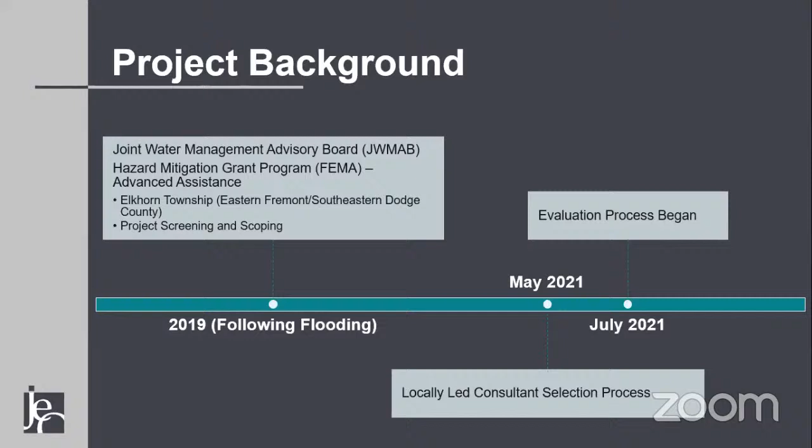Is really what this ultimately works out in. It's a unique opportunity, and it's a great thing to take advantage of. So we really started in earnest back in May 2021. And up till now, we've got the preferred alternative that we're going to share with you. And then we're going to be wrapping the ultimate project up in roughly June of 2023. So that's our overall schedule.

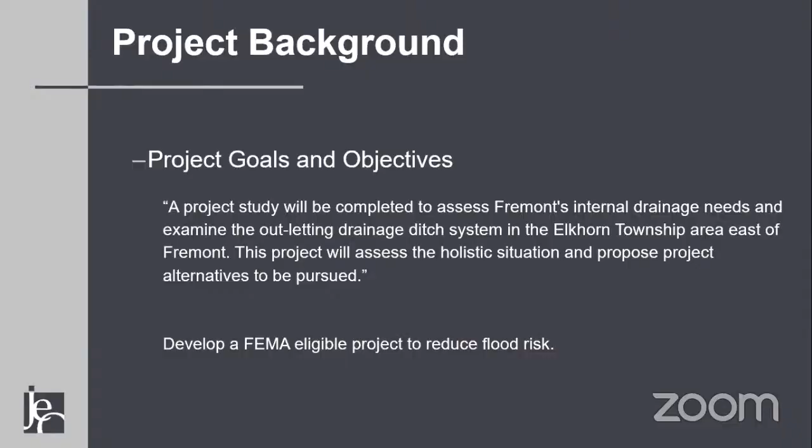And as we look at the grant application that Tom put together successfully, it really is to look at the whole Elkhorn Township area comprehensively to develop a comprehensive solution. This is an opportunity not to just pick around the edges and do something to maybe quiet the coffee shop talk. This is a chance to actually do something. And unfortunately, there's a problem that's been getting worse over the years, and it's been avoided because it's expensive. And that's just an unfortunate situation. But what we're talking about here is a way out, or at least a path forward to where we can hopefully eat this elephant.

So where is Elkhorn Township? I know some of you may be a little more familiar with the geography than others, but Elkhorn Township really has the western boundary of Highway 77, and it goes east all the way to the Elkhorn River. It really starts at the southern end of Dodge County, and it runs north all the way up to County Road T. So there's a number of very critical facilities in this area. There's the hospital, there's a power plant, there's a wastewater treatment plant. There's a number of churches and schools and all those critical facilities that, as you think of what happens when a flood comes, those are the places people go to for safe haven.

Another key component of this particular project, and you can see in these blue lines, they kind of crisscross things. This township in particular has a well-defined drainage network, and I kind of call it a spaghetti network of ditches that go everywhere. I got it. Yeah. So it's got a spaghetti network of drainage ditches that really go everywhere. They're all interconnected and everything else. So it makes it very complicated to address.

This township included a drainage district in the 1920s that really went defunct. I think they ran out of assets, but there were a number of easements identified for these drainage districts. Not all of them, but some of them. But all of those assets ended up going to the county. And it's kind of been in limbo ever since. So now is an opportunity to really look at some of these things. Another key component of this, and I probably will use the cursor to point things out. Hopefully everybody can just see the arrow.

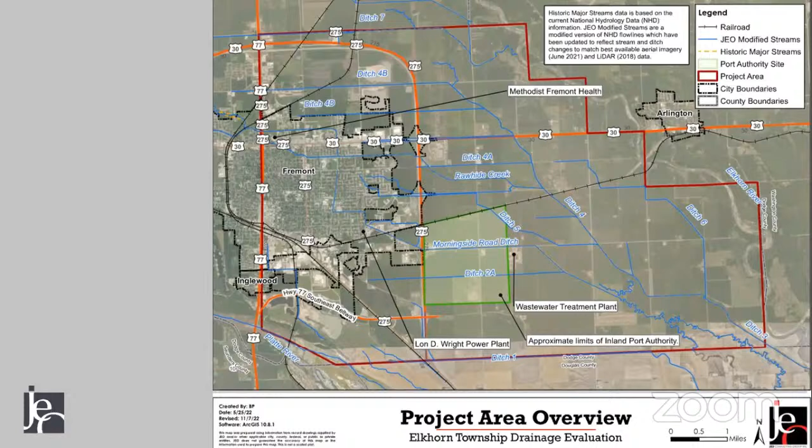So the other thing I wanted to address too is how does this project tie into all of the other things that are going on right now? This is only one of many drainage projects that are under review right now, and one that John Peterson talked about at length was this orange boundary. It's the Rawhide Creek WFPO project. And that project really looks at the entire Rawhide Creek watershed all the way out to Schuyler. We've been differentiating these two projects, because they really overlap in area and they both look at portions of the Rawhide Creek. The Rawhide Creek WFPO project, the intent of that is to really keep floodwaters from the west from getting to town.

And the Elkhorn Township project is how do we get water that falls in town out? So that's kind of the distinction of those two projects, at least on a high level, a way to kind of keep them separate. But there also is a Fremont West project that is just kicking off now that we're going to be doing some additional meetings here and getting started on. It has a similar scope to the Elkhorn Township, but it's just for a different area. Really starts at Highway 77 and goes west.

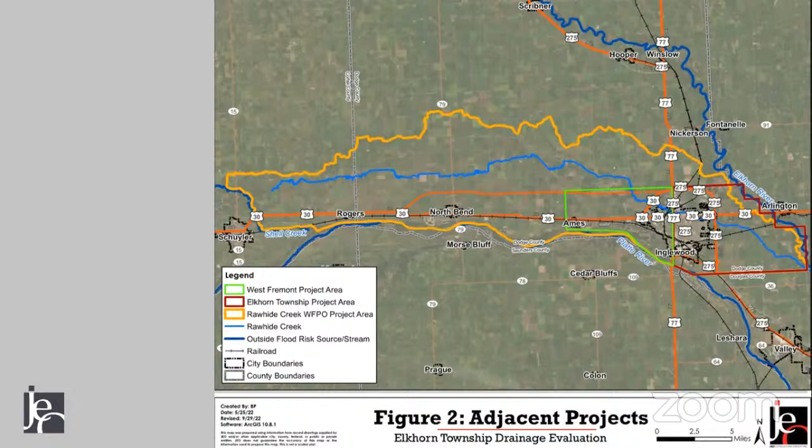So really, where are we at now with this whole process? I mentioned that we're kind of in a transition phase. And as we really look through this, the things that we've done now really it's evaluating the existing conditions, identifying what those deficiencies are, and then coming up with solutions for that. And then once we have a number of different solutions or alternatives, kind of wading through which ones make sense.

They all have pros and cons. There's costs to consider. There's political considerations. There's land rights, and all of those things kind of go into choosing what is the preferred alternative. And that's really right where we're at right now. There's been a lot of work done with the staffs of the various entities. And we have a project that seems to make sense to move on to the next stage. And that's going to make up the bulk of the next few months here as we go forward.

It's going to be that grant application. Our grant application is going to be due back to Tom Smith in the county, so we can get it submitted into NEMA. But it's going to be due roughly June of 2023, so that we can use the summer months to fine tune and work back and forth with NEMA and FEMA, so that the final submittal to FEMA is actually in the fall.

But there's a number of different things we're going to be working on over the next few months that all really support that grant application. And as we get into what the grant actually is, I'll get into that. But the whole point is what do we do to improve our chances? That's really what the next few months are all about. The one thing I did want to point out, though, is that at this point with the grant that we have, design, right-of-way acquisition, construction, none of those things are funded as of right now. All of those things will be included in the future grant application.

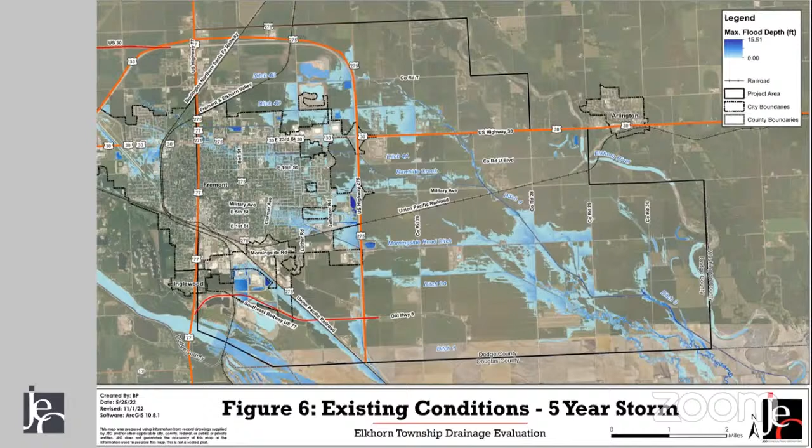So as we look at this, there are a handful of deficiencies that jump out at me. And as I go through this, don't take this as an order from bad to worse or anything like that. I'm really just going from the east side to the west side. So the first ones are all of these rural ditches, and I'm going to say all of them because they all are problematic.

For this 5-year event, what a lot of them are showing is that they're either running bank full or they've already overtopped the bank, which gets into why there's so much ag flooding in this area. So the conveyance of the ditch network is just inadequate. And that includes the ditches along the roadway network, but also those named ditches, some of which the county operates, some of which the NRD operates, some of which are probably just going through farm fields that nobody's really doing much to. But we'll call it the ag network of ditches is one deficiency.

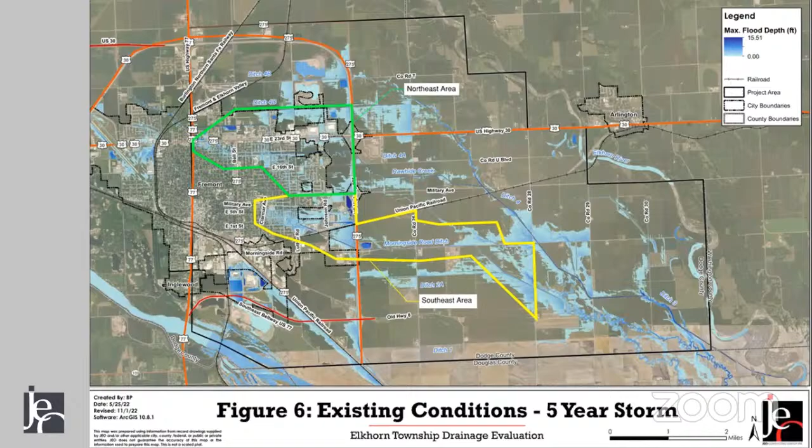So what we've developed in our study is really some very high level concepts for the north area, but the south area is the one we really focused on developing. And that's likely what we'll move forward into a future grant application. So what are some of those things that we kicked around to do?

So I mentioned earlier that eventually the deliverable of this project is a grant application to FEMA. So that's what we need to get to. So we really need to keep in mind what are those eligible things that we can do. It really centers around flood risk reduction, and it has to meet a benefit cost analysis. So as we started working through all the various different alternatives and ideas, it's with that in mind. How do we maximize benefits and make sure that we have more benefits than costs?

So I'll go through each one of these independently, but to let you know the idea and the process that we use, we actually look as a first step at each one of these things in a vacuum. So for example, if we only did an alternate channel to the Platte River, if that's all we did and nothing else, what's the impact? If we only did a groundwater dewatering system, what's the impact? What's the impact of a storm sewer only improvement? So we went independently one by one to see what matters and what doesn't.

And then I'll give you a preview of where we're ending up. The ultimate project kind of packages a handful of these things all together so we can really maximize those benefits and have the most bang for the buck. And keep in mind, what's really driving that is that earlier slide that I showed, is that we have about 5 different things that are all equally bad. We have ditch network, highway culverts, railroad culverts, city storm sewer, all those things are equally bad. So by fixing any one of them, we really don't see any benefit.

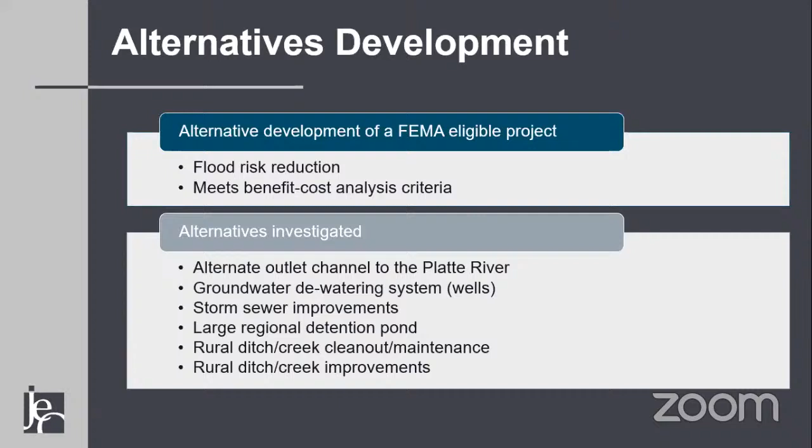So just to go through some of the ideas that we went through. So the first one we looked at was an alternate outlet to the Platte. As you probably remember, the map where we have Rawhide Creek and all of that spaghetti network of road ditches, they all drain east, southeast to the Elkhorn River. So one idea was maybe we can provide additional conveyance if we just go directly south and get it to the Platte River.

So the first thing that really ruled this one out is that the existing ditches, and to give you a point of reference, the existing ditch at Morningside, it's also called the sewer ditch, runs out east. The flow line or the bottom of that ditch is lower than the Platte River is. So in order to drain to the Platte River, we'd be going uphill. So that right there generally rules that out, because we need this to function with some fluctuation in both the Platte River or Elkhorn River, whichever one we're going to, because if it's raining in Fremont, it's likely raining in other places too.

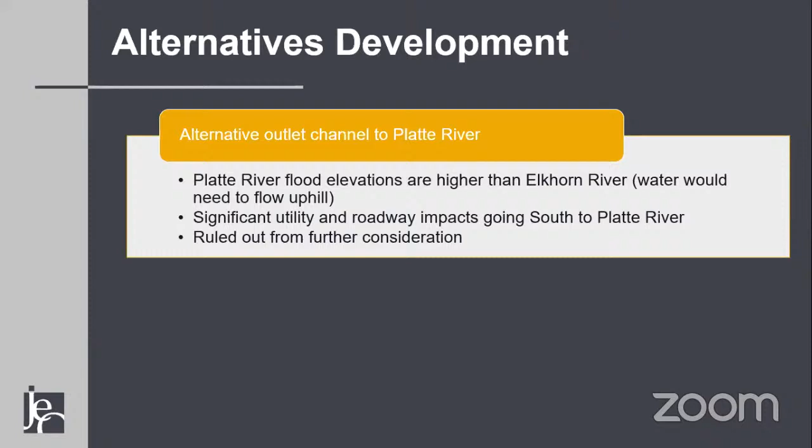So this one was actually ruled out from future consideration. Another one that we heard that was worth looking into and having some ideas on is what would happen if there was just a massive groundwater dewatering system for the entire east part of town.

So what this would encompass or look like is dozens of high capacity groundwater wells that all pump groundwater and then discharge it to something else. This would be what's called a non-consumptive use. So this would be a pump and dump situation. We're just pumping water out of the ground, putting it in a ditch. We're not doing anything productive with that water.

So one of the big challenges of a system like that is, what do you do with all of that water? So generally speaking, in order to have any meaningful reduction in groundwater levels, we would need to be pumping somewhere in the neighborhood of about 60 to 75 cubic feet per second. If you're not in that world, it might not resonate. But what that does is it really doesn't drop the groundwater level regionally. It does very close to the well, but regionally, it only drops it maybe a foot or two, maybe 3 feet at most.

But a bigger problem is, now what do you do with all that 60 to 75 CFS of water? The most logical place is to dump it back in the ditches that we just showed. They're already way undersized. So ultimately you would be using up nearly all of the capacity of the ditches 24 hours a day with a pump. So when it does rain, the rainwater actually has nowhere to go.

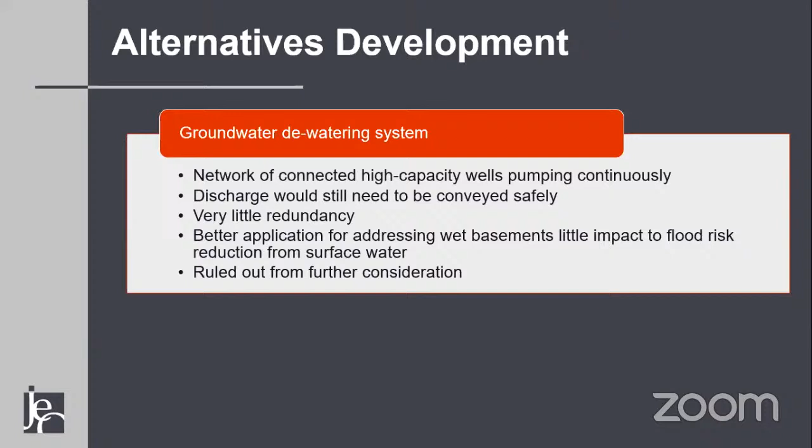So there is a very, very high likelihood that unless you address all of the downstream ditches or potentially pump this all the way to the Elkhorn River, you'd actually be making the problem worse because you now have nowhere for the surface water to go, and you've not really improved things too much. So again, this one was actually ruled out for further consideration.

So the next one we did was really look at what if we just do a massive storm sewer improvement in town. We can start widening the urban ditches. Most of those are pretty much shoehorned into existing right of way, but there would be an opportunity to make all of the storm sewer pipes bigger. That totally is on the table and one of the things we looked at.

The big challenge is we're starting at the upstream end of the system, so we're making those things bigger without any way to get the water all the way to the river. We still have deficiencies at the railroad, at the highway, and the rural ditches. It does make things better immediately in the area where we'd add the storm sewer, but all it does is dump the problem downstream on somebody else.

So in and of itself, the storm sewer improvement is not something that will work. We'll come back to this, and it does play a role in part of the overall one, but it has to be paired with some of these other things, or it's just frankly not going to work.

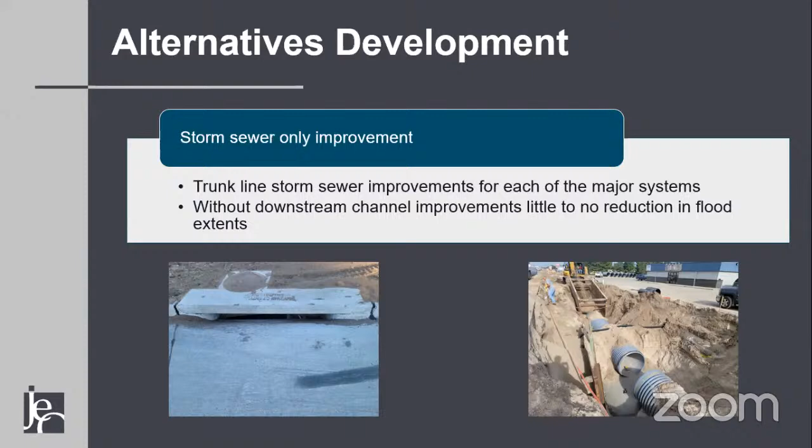So another one we looked at is what happens if we created some storage, had a massive detention pond somewhere. So one thing to keep in mind with detention ponds is that they do a great job of reducing flood risk downstream of wherever the pond is, but they basically do nothing upstream if that's the only thing you do, right? So if we were going to look at a detention pond only alternative, the best place for the detention pond is right where all the homes are that we're trying to save, which is completely counterintuitive.

So again, the detention ponds that we looked at on a detention only alternative were west of Highway 275 in the already developed area. And there just wasn't enough open ground or publicly owned ground to really move the needle that much. And then we also saw an issue that it didn't really solve anything if we weren't fixing anything either upstream or downstream. But again, we'll come back to this one as well, because when it's paired with other things, it starts to make sense.

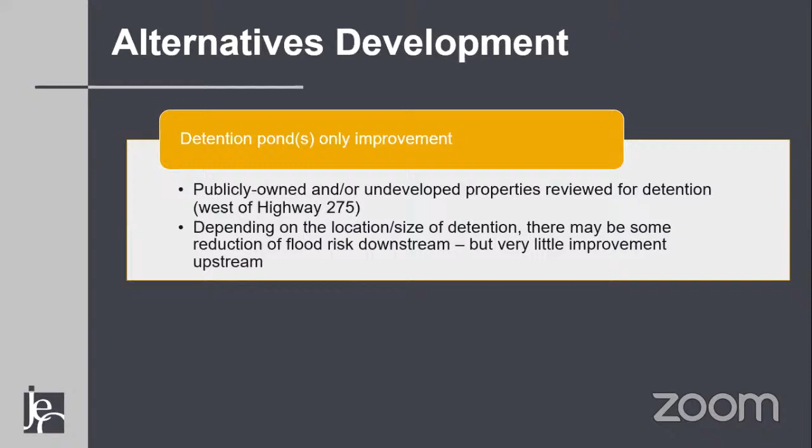So another one that we really looked at was, well, we've got these ditches that are running all over in the rural part of the county. What happens if we just clean them out? Right? I think anybody that drives through there will say there's a lot of trees and debris and corn stalks and everything else that has built up over time. I think that's a fact that we can't avoid.

But if we were to open those things back up, back to their original shape, how much benefit would that really give us? I think the one thing to point out is that this is a representative cross-section of what those channels would actually have to be if we're going to pass that 5-year event entirely within the channel. So the way it works out is the existing channel has somewhere in the neighborhood of about 125 cubic feet per second. At that particular cross-section, we would need to pass 590 cubic feet per second to address the 5-year flooding.

So the question still remains, if we were to clean out the ditches, would it help? Well, yes, but it doesn't help for the 5-year event. It doesn't help for the 2-year event. It would help for the 1-year event. It'd help for the 6-month event, but we're going to very quickly overwhelm the system downstream unless we physically make those channels wider.

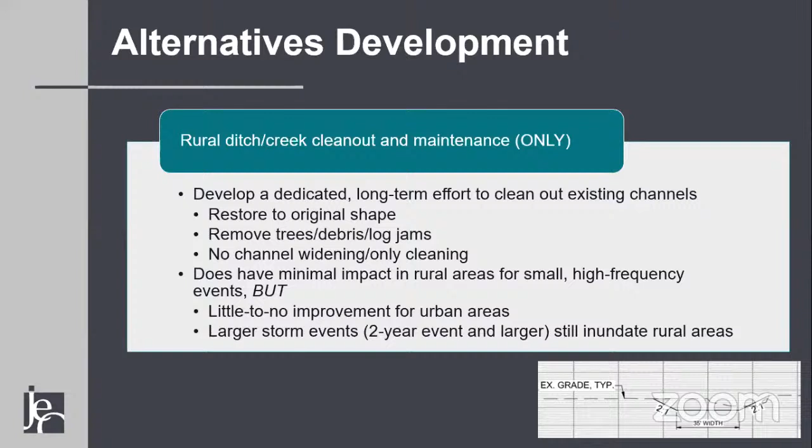So really that gets into our next option: what happens if we just do that? What happens if we just widen all of the ditches out in the rural part of the county and do nothing else, all the way to the Elkhorn River? Some of you may be familiar, but there was a project to do just that on the books in 1997. It was a joint city, county, NRD project that was kicked around. It ultimately fell apart because of funding and some other things. It's probably not relevant for right now.

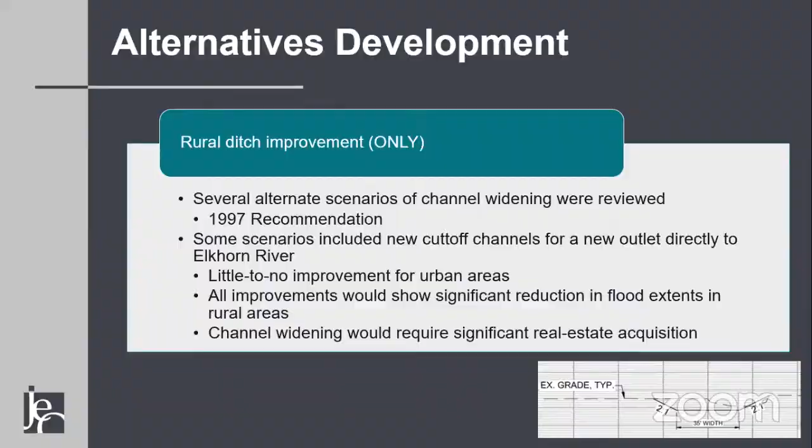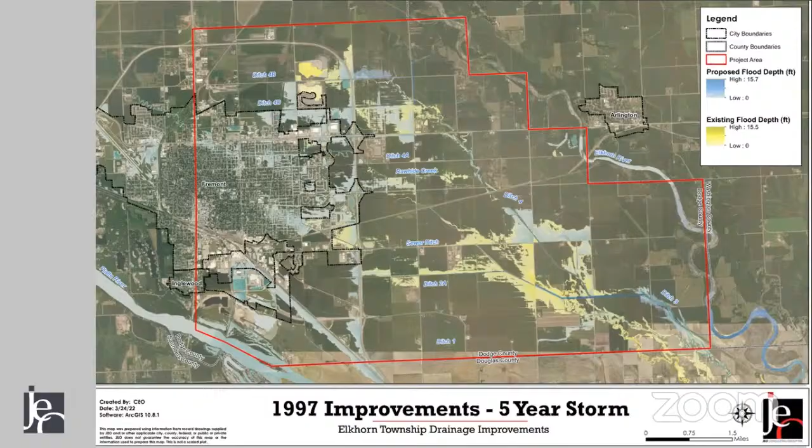If you really zoomed in on this map, you'd see a little sliver of yellow around the fringe, but it's minor. We're talking a reduction of maybe a couple inches up in there rather than feet. And the big reason for that is because we've addressed one of those deficiencies, the rural ditches, but the other 3 or 4 we haven't touched. So that's where we got into, okay, we've got a lot of things that don't work. That's not very helpful. Tell me something that does.

So that's where we start packaging these things together. I'll show you several maps, but I wanted to get it out here in a narrative version for those folks that are more text oriented. We start with, on the east end, a detention pond that would be proposed somewhere east of Highway 275. The final location of that is yet to be determined. There's a lot of irons in the fire. There's a lot of opportunities out there. We just need to work through some of those things.

Then we would need a channel improvement upstream of that detention pond so that we can get more water to the detention pond, really all the way up to where the existing channel daylights at 5th and Luther in town. We would also need culvert improvements associated with those channel improvements at US 275 at only one location, at Morningside. We're not talking about all 5 of those going up north, but at Morningside. And then also the railroad, which is a significant restriction.

But then storm sewer improvements or some of the urban channel cleaning out and maintenance on both 1st Street and 5th Street, which there already is a project out there. I think it's in the planning stages of budgeting for a 1st Street paving improvement.

It'd make perfect sense to do those things at that time, and that's really why we chose 1st Street, so those 2 things can be tied together. But then another big piece of this is the existing channels downstream or east of wherever this detention pond are all still need cleaned out. So you would be working with the county and NRD and the city to develop an operation and maintenance plan, develop a list of responsibilities, and some timing of when those things need to happen.

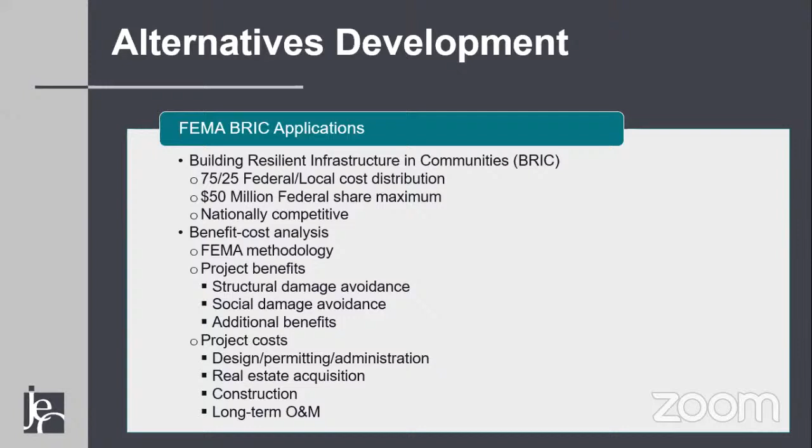And then a big piece of this is that in order for FEMA to buy off on the project and ultimately fund it, having an actual agreed upon long-term operation and maintenance plan that's funded is another critical element. So it has to be funded. We can't just say that we're gonna make Scott go out there with a push lawnmower and deal with this. That's not practical. So having that done is pretty critical, but those costs are rolled into the actual application as well.

So as we look at this, the first side of the equation is benefits. How do we come up with that? So a few key elements, at least as we've got it in concept right now. We're looking at 300 urban properties that we're seeing flood risk reduction for, which is a pretty significant amount, right? And when we add up all that yellow area in the rural part, it actually ends up being 105 acres. If we take some advantage of maybe building the detention pond bigger, I think we can shrink that, or we can add to this number by shaving off even more flows out of the detention pond.

But our biggest benefit really coming out of this is the structural damage avoidance of between 65 and 75 million. So you're going to see ranges on here. Keep in mind, it's the goal over the next few months to get that from a range to a number.

So that's where we're heading next. What the structural damages really are a function of is how much are you reducing the flood depth at any one structure, and what's the value of that structure. So the value we pulled right off of the county assessor's information, and the flood depths we pulled right off of our model. So in the next few months here, we are going to be working on doing some actual surveying so that we can have real first floor elevations.

We pulled a lot of those since we have 300 properties that we're looking at. Pulled a lot of that information off of available information like LiDAR. So we're going to be firming that up and getting to a little better number. But I actually feel it's going to be closer to 75 million.

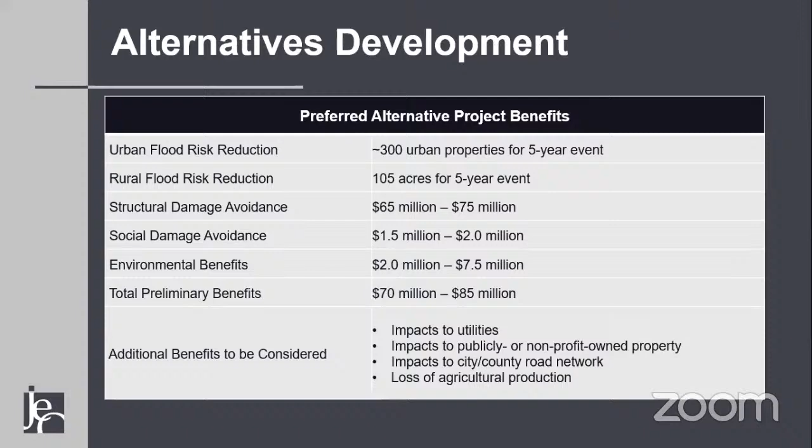So if we really look at the cost side, obviously this is a big project. I'm sure you're all expecting a big number. Right now, I've got this broken up into 3 separate phases. One of the big things that we're going to be doing over the next few months is having conversations with the city and the county, primarily the NRD.

Might not have as much to weigh in on, but how does this animal get broken up? Just because FEMA looks at it as one overall project, it doesn't necessarily need to be one project in the eyes of the city and county and NRD. The city could lead this piece, the county could lead that piece, the NRD could lead that piece.

That's what we need to figure out. So this phasing is likely to get cut up quite a bit. But the bottom line, when we're looking at an all-in number, we're really looking at a $55.4 million improvement. What that includes is not only the construction, but all the administrative fees; we just applied a straight percent to it. It also includes land acquisition costs, permitting costs, all those various different things,

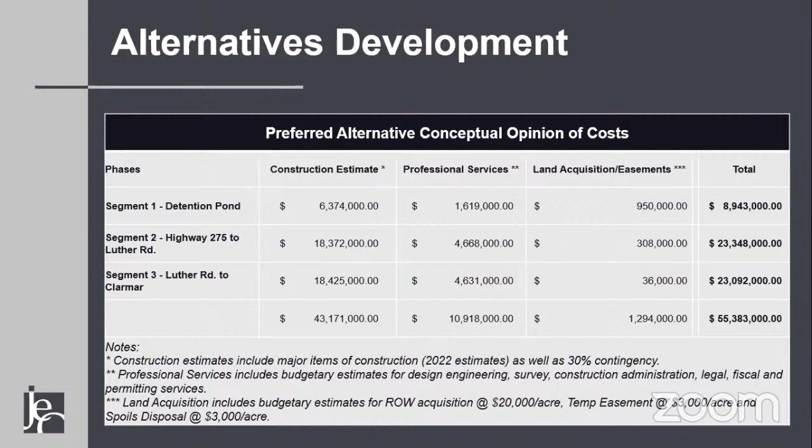so you can have kind of an all-in project cost. So when we do this preliminary benefit cost analysis, you do all this work and it all boils down to one number. All you do is divide your benefits by your costs, and as long as that number is greater than 1, you're eligible. So ultimately we have a cost of 55 million and benefits on the low end of 70 million. So that's a positive number. It's a 1.27 to 1.55 where we're sitting right now.

Now we have some additional benefits to add in there. The way the process goes, having been through it, FEMA is always going to find something to ding you on. They're going to try to take something out. So we do not want to go into the process with a benefit cost of like 1.01 because they will find a way to kick you out. We have to have some fluff in this thing.

Then again, we don't want to go in too high. It's a game, right? If we go in with too high a number, they're not going to believe that it can possibly be that much, so they'll find another way to kick you out for that one too. So we have this sweet spot of about 1.5. I'm sure you've done projects with this before. Is that benefit cost ratio in the ballpark? Have you worked with numbers like that before?

Yeah, so I've had projects in Nebraska, 3 or 4 of them in Lincoln, Nebraska City, all over. Generally speaking, if you're in that 1.5 ballpark, you're sitting pretty good. It doesn't do you any more good to have a benefit cost ratio of like 3. They don't give you bonus points, right? All you have to show is the project is beneficial, and that's the metric.

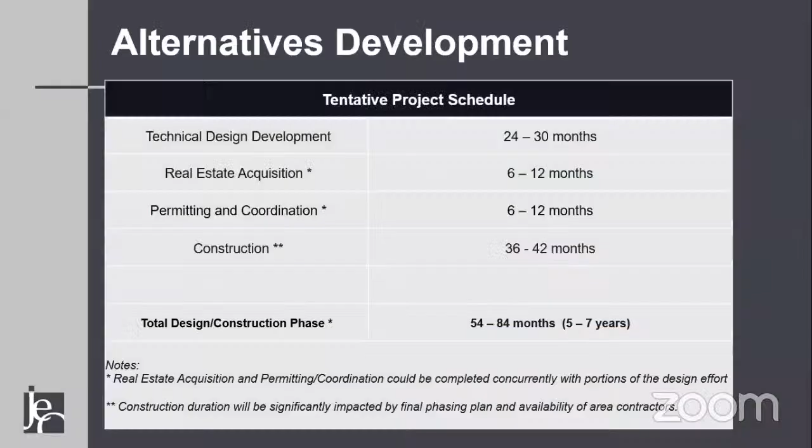So the way the standard process works is you look at the lifespan of the project. For a project like this, it's 25 years. You can ask for an additional up to 50, but the standard is 25 years. So if we look back at that flood map, all of those 300 different parcels, we look at what is the monetized benefit over the course of those 25 years.

It's this double-edged sword. Nobody wants to see flooding, but for our benefit cost, you get more benefits if you have flooding in a smaller, more frequent event than a 2019 type of thing. Statistically, that's very rare. A 2 or 3 inch rain that floods out a handful of houses is pretty common. So we take all of those things over the lifespan and get them into 2022 dollars, and that's how we do our comparison. We are building that into our cost opinions. There was a 30% contingency built in on that, again in 2022 dollars.

So that contingency is for a lot of the detailed things that we haven't even gotten into yet, like utility impacts and locations and some of those things. But a lot of it, probably half of that, is just fluff. We want to make sure that we have enough room in there.

The benefits I mentioned were driven for the most part off the property values, and with property values it's hard to know what's going on. If there's a huge crash coming, we'll have to see where that's at. But what they've been determined on right now is exactly what's in the assessor's 2022 database. So historically, we could count on those continuing to creep up, and they were keeping pace or more than the inflation we saw.

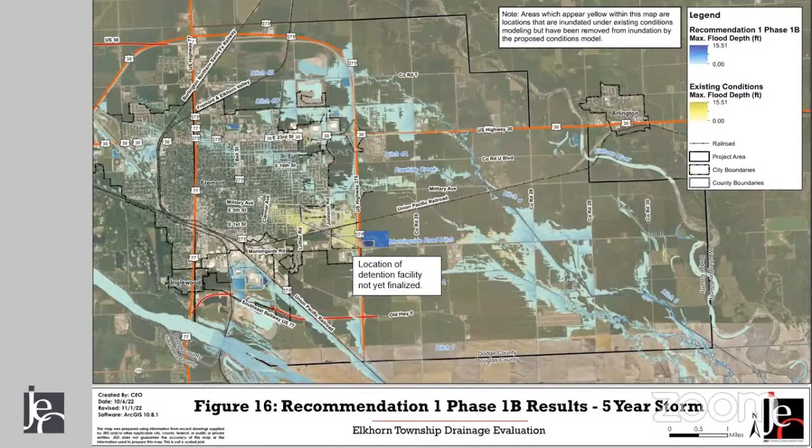Oh, yeah. We'll go on. Interesting, huh? Oh, man. Yeah.